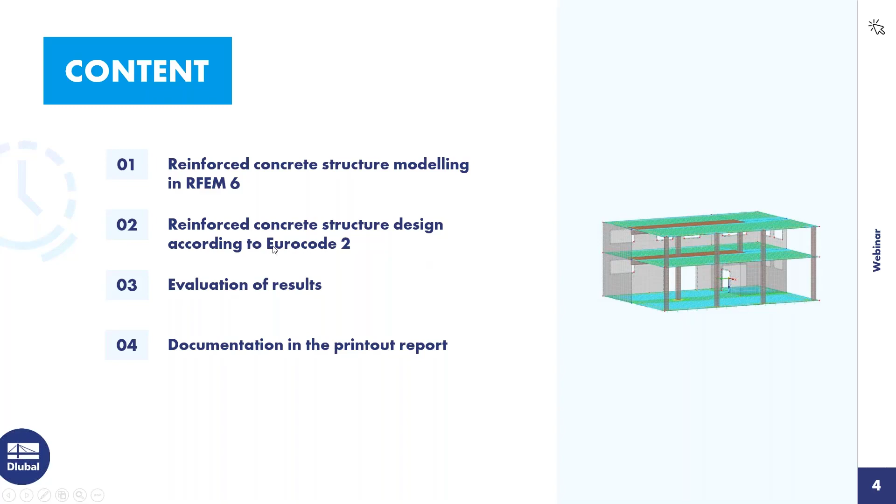And documentate our calculation. I will go now directly into the structure, in the RFEM structure. The structure was already defined with the members and the slabs. I only give you a short overview about the used objects.

The basics of the reinforced concrete design, and also the design of members, the reinforcement, definition of members, also the design by using the member representatives, if we have more similar members, was shown in the first webinar for reinforced concrete structures, which was made or shown in November of last year. There are shown the basic steps, how you can define the properties and the settings, and my colleague Caroline will write the link into the chat where you can find this webinar. It is very good for the beginning.

So therefore, I will go now today in the design, especially to things which were not shown in the first webinar. The punching design was not so detailed, and also not the rib design.

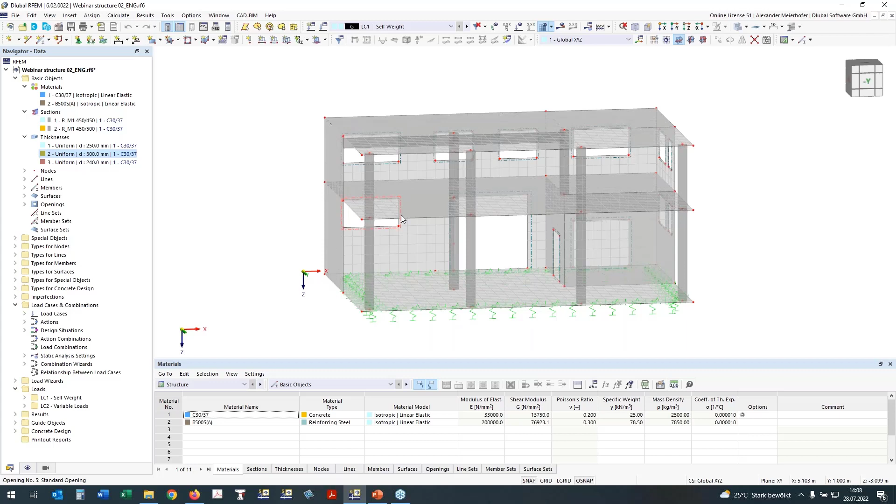The building now has elastic springs, elastic support, and this will also have an influence later in the settings for the deflection design, which I will show you.

At first, I want to deal with such nodes where we have the connection between the columns and the slab. Here we should place mesh refinements to get a better FE mesh. For this, I go to the data navigator, where by double click I can open a new nodal mesh refinement, and give my settings, which I have for radius 1 meter, and the inner target FE length is 15 centimeters. It comes from the dimension of the cross section of the columns.

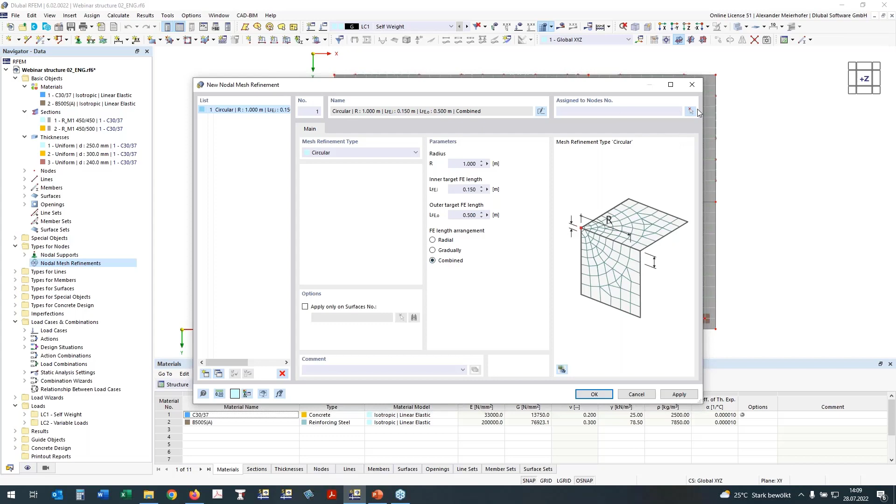For the length arrangement, I use the combined approach, and now I will assign the nodes with two rectangles where I want to have the refinement. If we take it through in the isometric view, we will see I have it caught, and everywhere was now my mesh refinement.

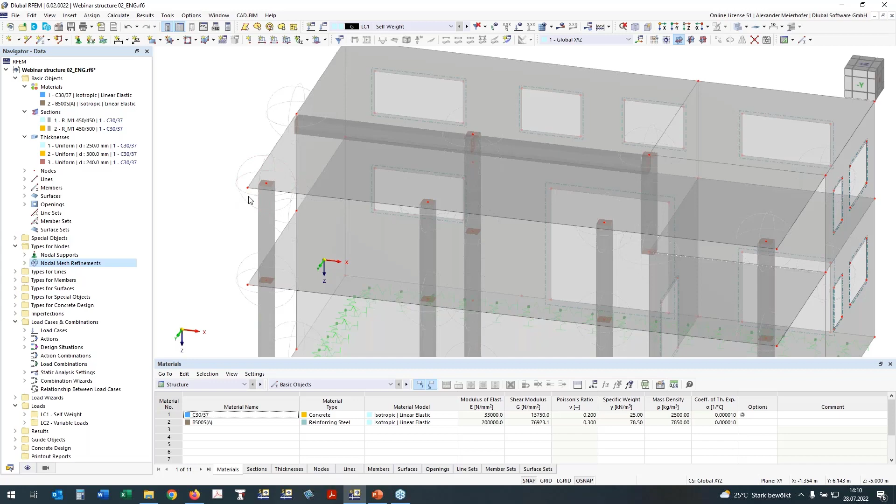On these nodes, from the column and the slab, we also have singularities, and how we can deal with these singularities in the concrete design is described in a very good knowledge base article on our website, which I want to advise you to read. Caroline will also send the link to this technical article in our chat, so you can find it very easily.

I will continue and select one approach, which is the use of the surface result adjustment. It means I will select or define the area which is exactly the width of the column, and set the inner forces of the surface there to 0.

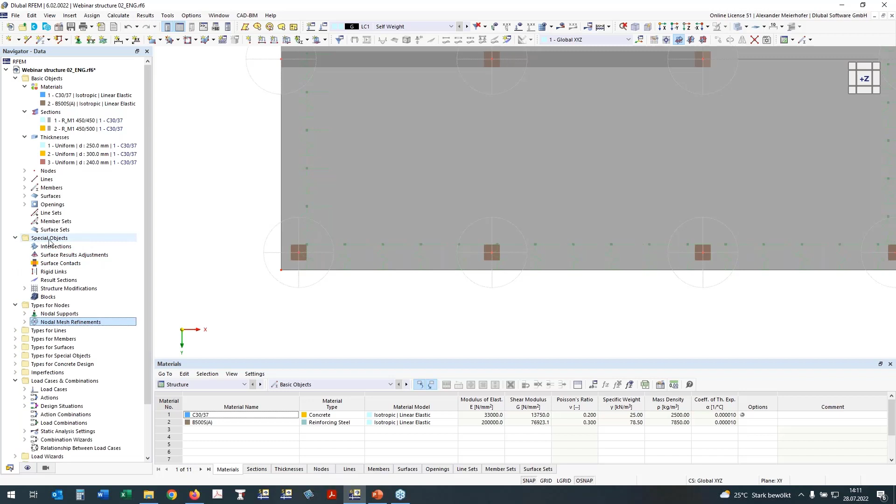Surface result adjustment can be found on the special objects. By double click, I can open the dialog, and now we can define a new rectangle result adjustment with the dimension of our columns.

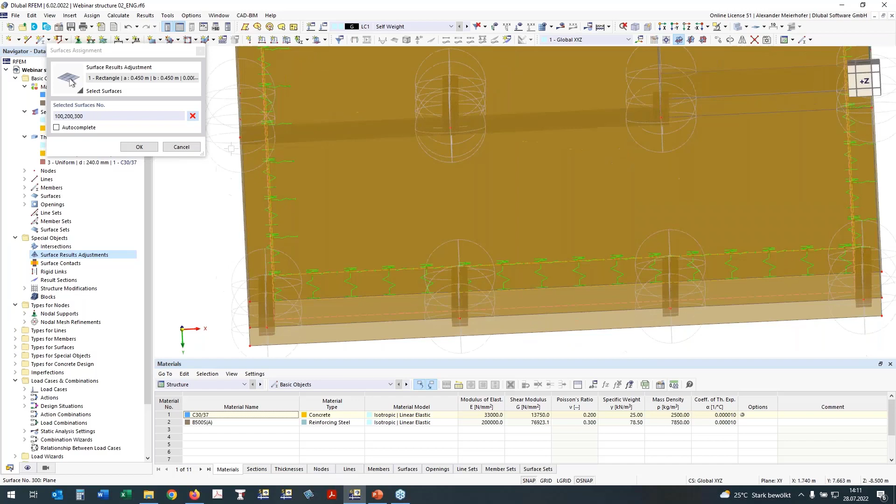I want to have it on all 3 surfaces, and you see the number of my surfaces was chosen so that I know where it is placed. So 100 is the slab on grade, 200 the slab over the ground floor, and 300 is the slab over the first floor. If I press OK, I have already assigned the surfaces, and now I have to define the center of my adjustment.

Here by copy, I can simply copy this adjustment and set only the new center of the result adjustments, and then I will have it in all areas.

I make one new and want to define it also over the wall. The width is 25 centimeters, and I defined a little bit bigger area, and defined it here because here is a wall. Define it also in this area.

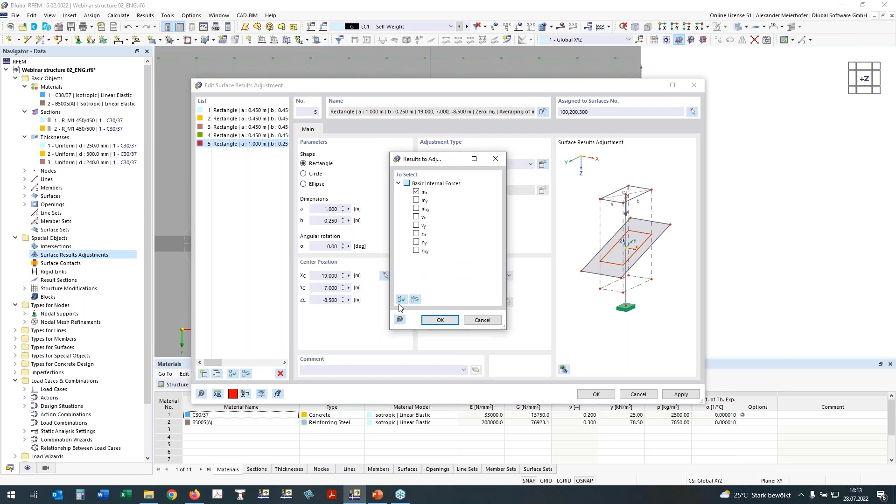I made one failure. Now I forgot to define the adjustment type. I want to set it to 0, and I want to set all inner forces to 0, and this should be done for all defined adjustments. So I was one step too fast before. This should be done before I copy it, and then it is always in the right setting. By OK, it will be placed.

We can see it, and we can also work here by drag and drop. We copy it by drag and drop. If we press the Control key, you can place it by drag and drop, and it's very simple to work with it. So this is then for the connection of the columns to the slab.

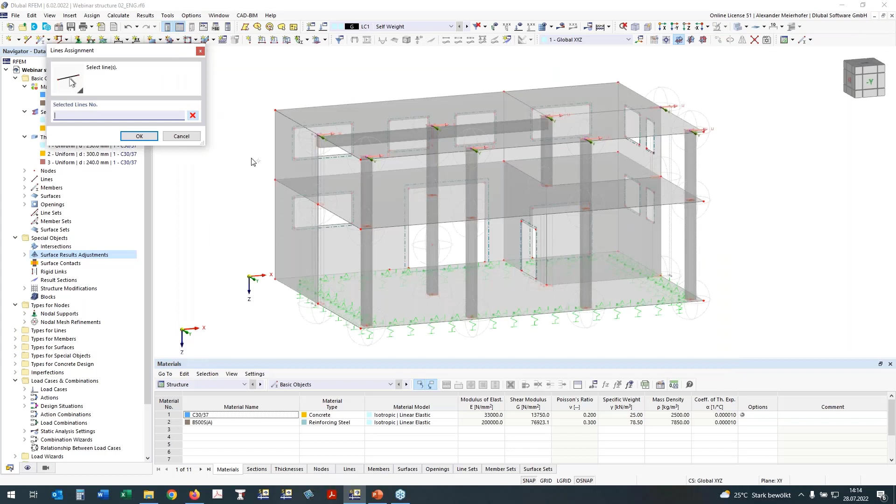One additional setting for the slab is necessary. I want to have hinges over the length of the supported line. The definition is very simple. We make a double click on the surfaces, and the edit surface dialog will open. Activate hinges, and in hinges I click to select lines, press Control, and then I have selected 3 lines where I want to have hinges.

The hinge type is by default already the moment hinge, and I will put it to all lines, the line hinges number 1. Okay, it's ready now, and if we take a look at our refinement, it is placed everywhere, and also the adjustment.

In the display navigator, we can deactivate the mesh refinements because I don't need them anymore for the work now, and the graphic is then more clear for the presentation. Display properties are placed now under the results objects, and then it's also deactivated.

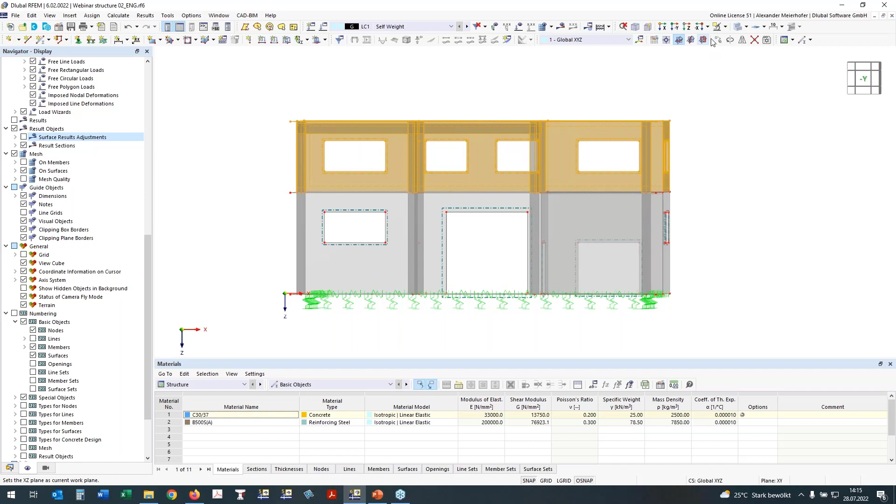As next step, I will define the rib for the slab over the ground. For this, I will hide the first floor by selection, and now I have the first floor.

By using new member, I can define now section rib by selection of the section number 2, which should be used for the web. The web should be 500 millimeter high.

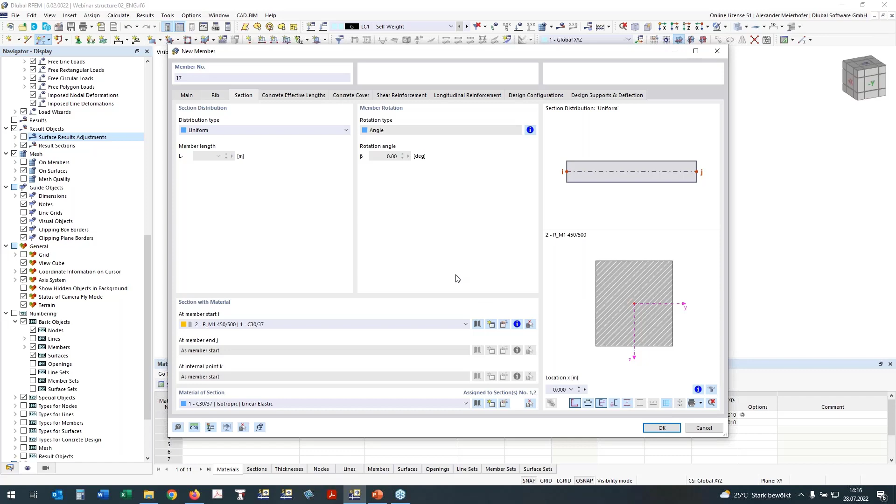I can define now the rib from here to here, and also from here to here. Oh, something was wrong. Okay, I do it again.

I know what was the topic. I will make the selection new and select only the slab which I want to show. So the new member is the same section, section number 2, and then from here to here.

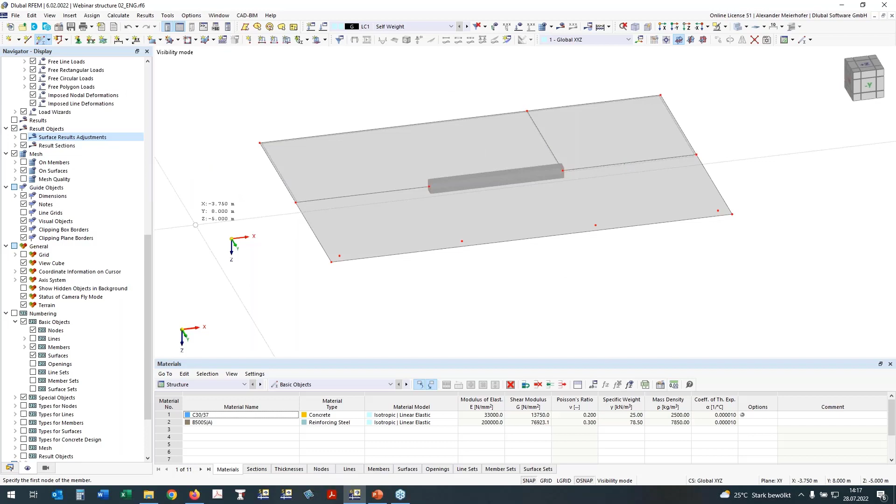By escape, I come to another point. So if we take a look to the complete view, we see here in the first part I took care about the rib. I go now in the rib section, and this is a very new feature that we can now also define more sections or segments during one length of the members. This is completely new developed.

I use here the calculation of the width, integration width according to Eurocode 2, and the splitting of the segments can be done in 50%, 85%, and also 100%. We see now we have more different integration points. Here we have an inner support, and it means we have to consider also for the calculation of the integration width the length of the neighbored span length. So I have to define here 180, and I have now my different integration width.

We have here also a new option that we can make a linear distribution from the integration width, and now we have defined the rib for the design.

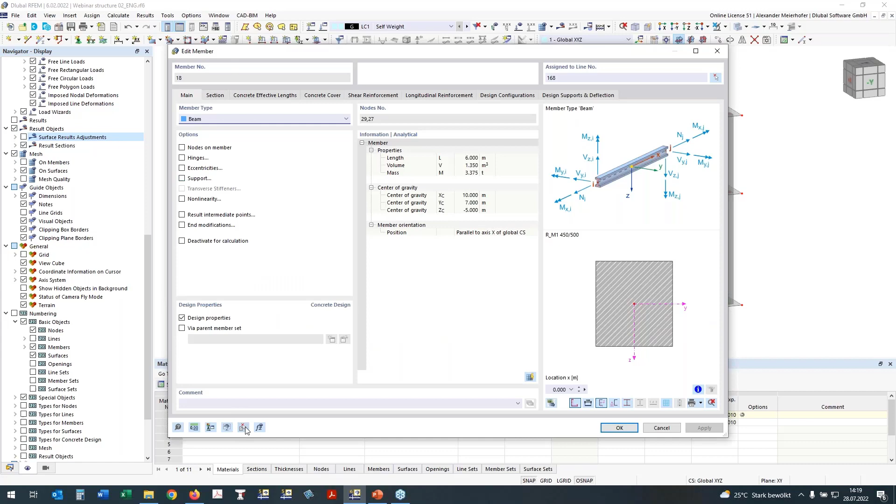For the second member, I use here the copy of object selections. It's a very nice tool. If I click here, we have really copied all inputs. It's a rib, and the only thing which I have to change is now that the end field is related to the segment, and this is for the user-defined point 80. And then the inputs for the static analyze is ready.

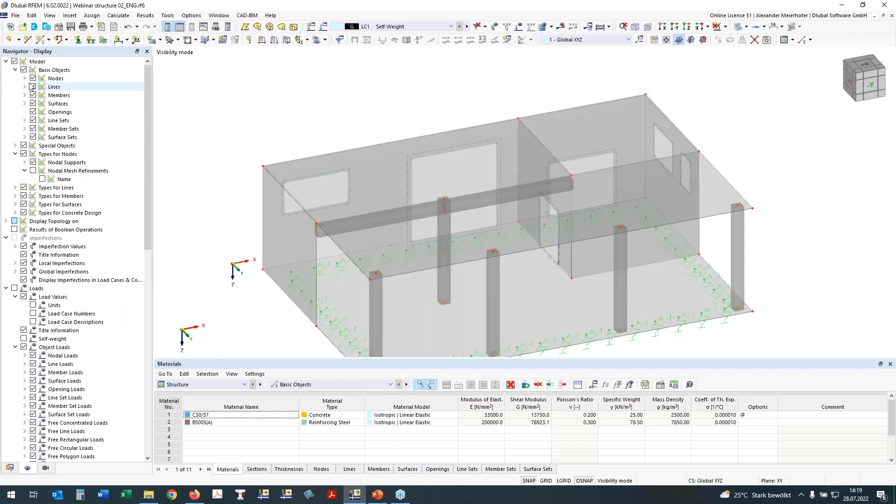And now I do it again what I did before. A very nice feature from RFEM 6 is now that we can show the rib section also in the graphic, and we see that the integration width is also shown here in our main graphic of RFEM.

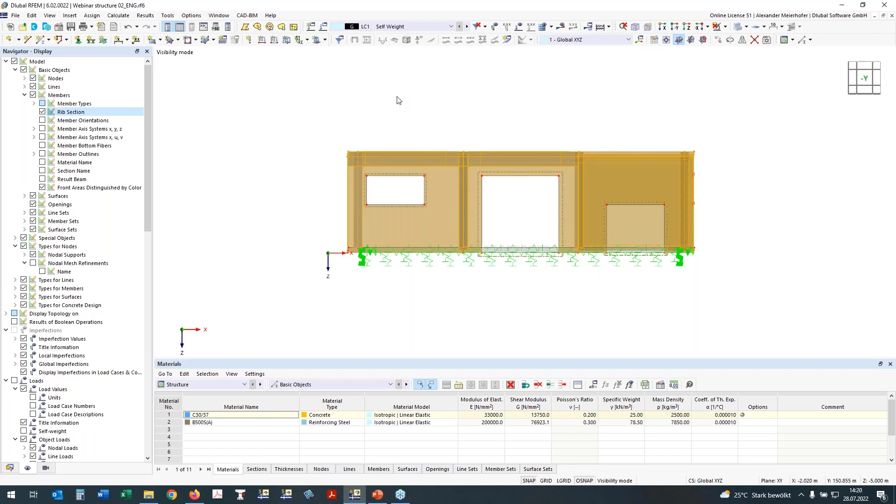Okay, now I will select again my slab here, and will continue with the definition of the design properties.

The design properties for the reinforced concrete calculation are activated by double click. I come into the surface dialog, and I continue with the concrete cover. The concrete exposure durability is defined by the exposure class, which is default to XC1. This is what I let.

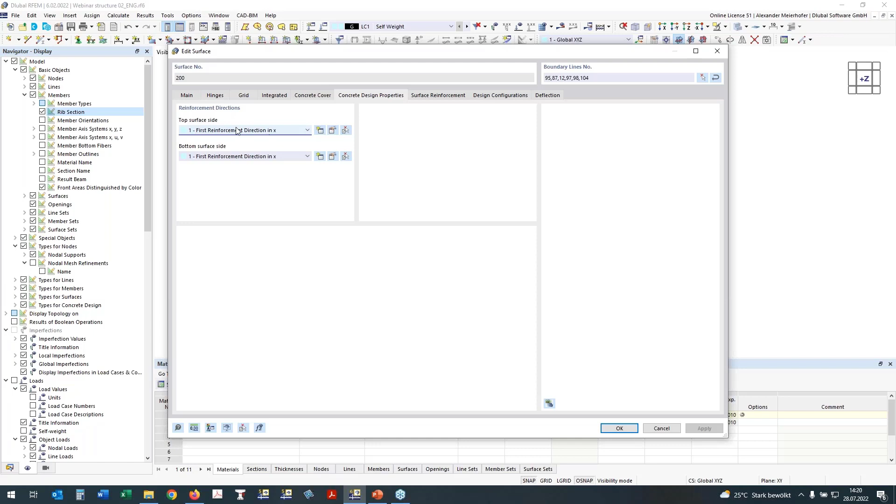It's okay. The design direction of the reinforcement, the first direction goes in X. This is also default, which I will not change. And here is one important topic. In the surface, I need a surface reinforcement for the diameters so that I will know the statical depth for the calculation. I just design a type of basic reinforcement.

Which will be in both directions, the diameter 10 with a distance also 10 centimeters, and by pressing OK it will be then assigned to the surface. Here are listed design configurations, which I don't discuss today.

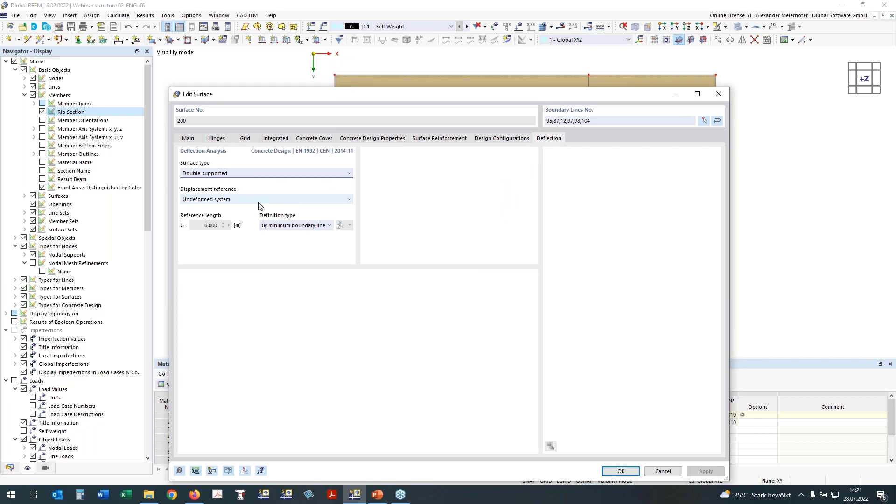This was in the first webinar very detailed. I will later take a look to the serviceability configuration. But here's one very important thing, which I mentioned before at the beginning.

We have an elastic supported structure. Therefore, it is an advantage to relate the deflection also to a deformed slab or plane. Here I use the parallel moved slab as a reference plane for the deformation, and as reference length I will define it manually by 2 points, saying my reference length for the maximum allowed deflection is from here to here. It's about 5.5 meters. By OK, I have defined all properties for the reinforcement design.

We can also take a look to the graphic. If we go to the types of concrete, we see here we have surface reinforcement longitudinal, and if we activate it, we see that the reinforcement is defined in this area.

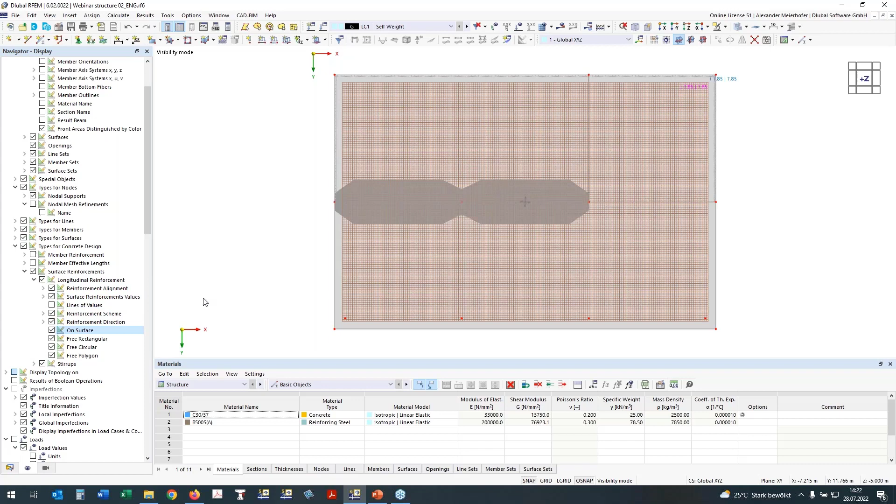Okay, I said that I will take care about the punching design of the nodes which are here. So it is like for all objects, we have to select it and go into the nodes or object dialog, edit nodes, and activate the design properties. Here it is only important for now that we have to check for design of the punching proof, and then we will have here also assigned the punching proof in the add-on concrete.

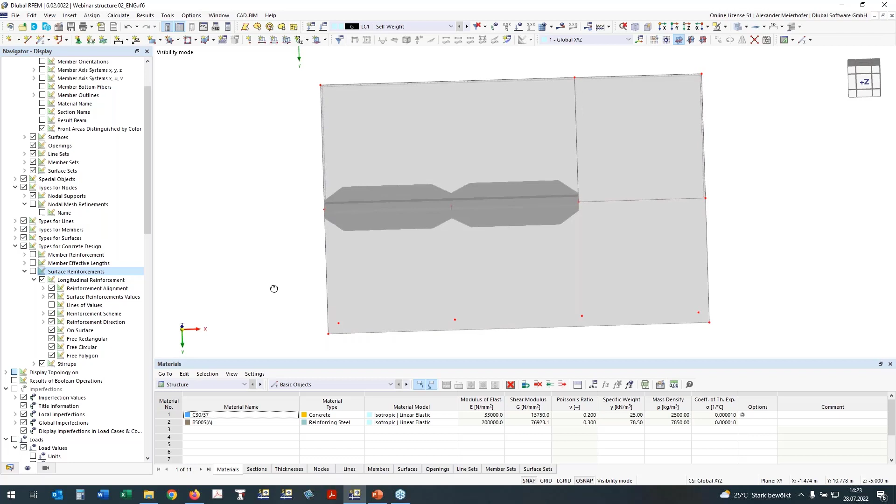I will go now to the definition of the ribs. Here we need also reinforcement. I want to design it not with two members, but with a set of members.

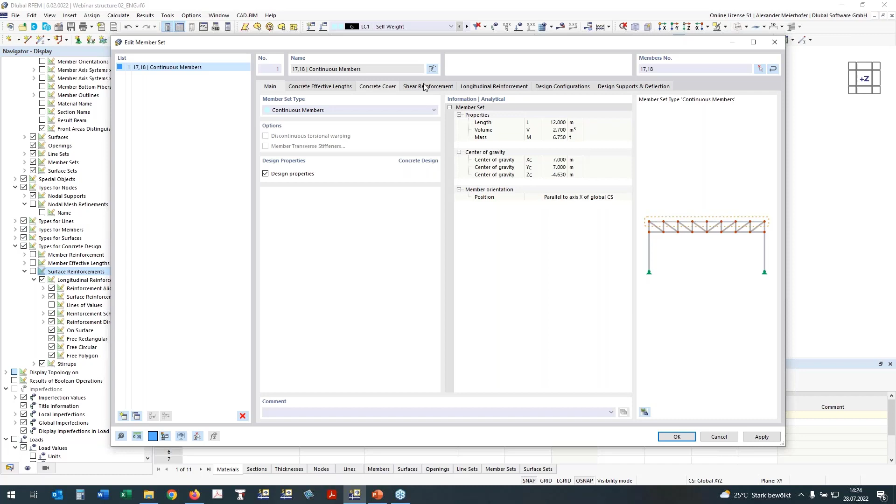So I select both, press Control key, and create a new set of members. Here we have now the new set of members, and I can say design properties for this set, and we see that all inputs for the design properties are now open. The concrete cover is shown, and here we have the same durability which we already used for the slab, XC1, and the shear reinforcement.

I will change the distance to 50 centimeters, and if we take a look in another view, we see here the cross sections, or the variable cross section of the rib is already shown, and also the reinforcement. I will go to the longitudinal reinforcement.

We see here the reinforcement which we defined for the slab design is already placed here. If we go more, we will see it. It is activated by this icon. If somebody doesn't want it, you can deactivate it, but I want it, so I will let it here.

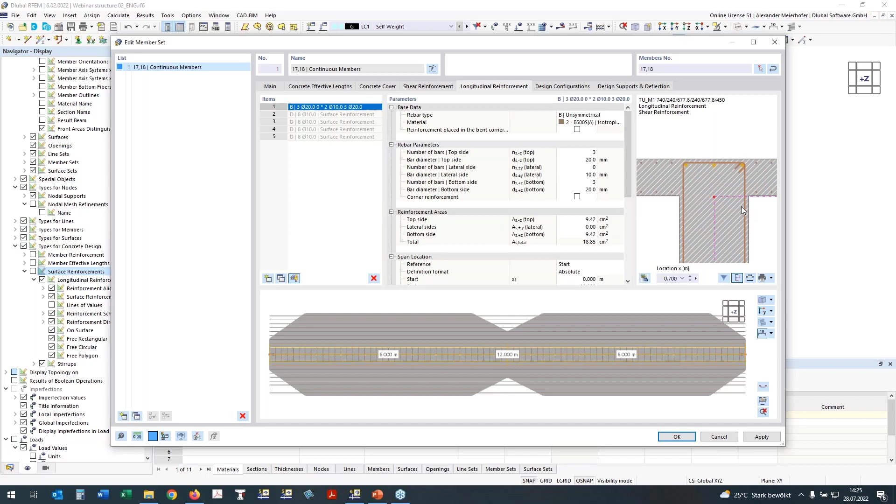But I will define now a different distribution of the longitudinal reinforcement. I want it unsymmetrical here in the web. So on the top side I will define these three rebars with diameter 20, but a lateral reinforcement also from 2 diameter 10.

And on the bottom side, I want to have 4 diameter 20. And it will be directly updated here in the graphic.

Here is also the 3D graphic of the reinforcement, which can be used for control of the inputs. Here we see a small reinforcement drawing, also the used shear reinforcement, which can be activated or deactivated. It's nice for control and for printing. Okay, I can close it.

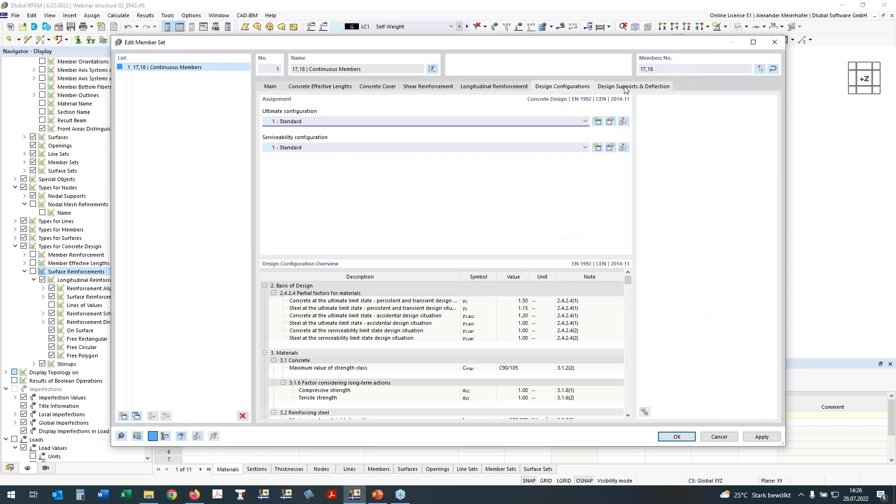Design configuration is the same as for surfaces in all parts, and now one important tab: we have to define the deflection properties or conditions. I want to check it only for the deflection in Z direction for the gravity loads, of course.

Here is the point: my reference is then the deformed segment ends. This is also the point which I mentioned. We have an elastic supported structure, so the supported ends will be a little bit displaced in Z, and this I don't want to have in the design check for the deflection.

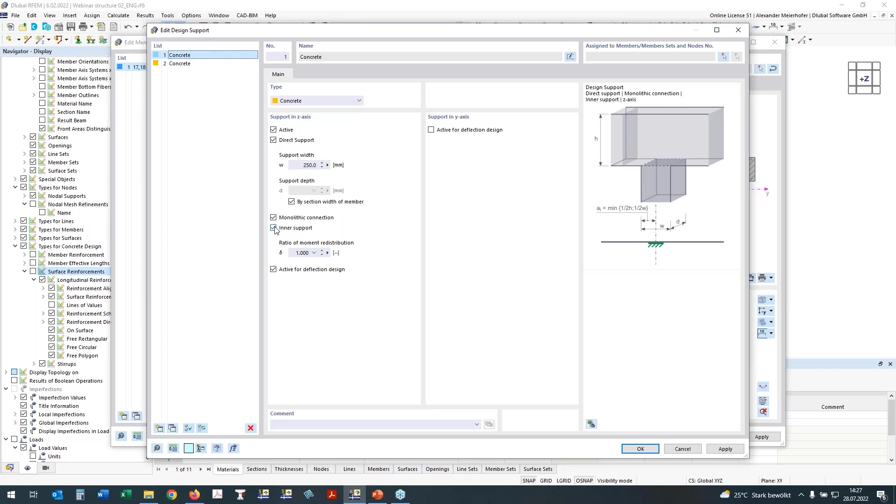Important is that I generate design supports at the ends or in the middle. We have here design support in Z direction, and our wall is 250 millimeters. It's a monolithic connection, and will be used for the walls at the end and the start. I directly copy it and use the width for the columns, which are inner supports, and here I have to deactivate inner supports and press OK, and then it will be placed directly at the beginning.

I will change the view here to see it. Here we have the first one, and at the end it will also be placed, with the 250 millimeters width, and in the center I will also use the design support, but now for the column it's bigger, 450 millimeters.

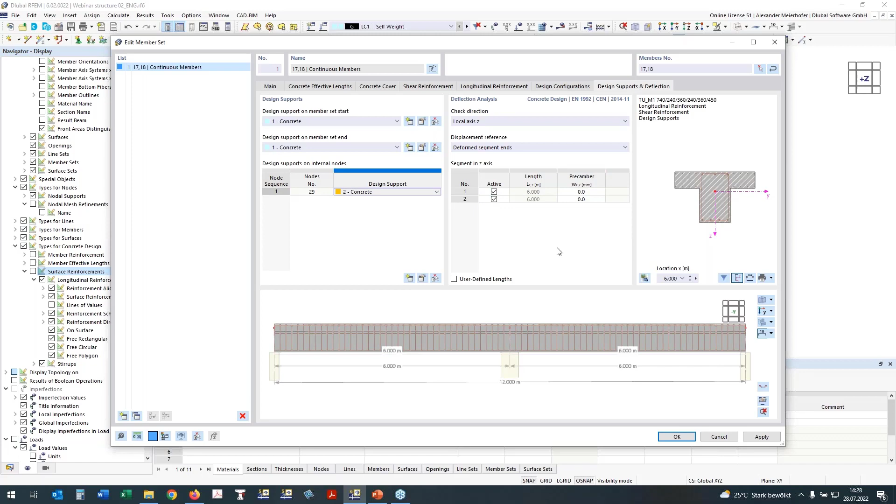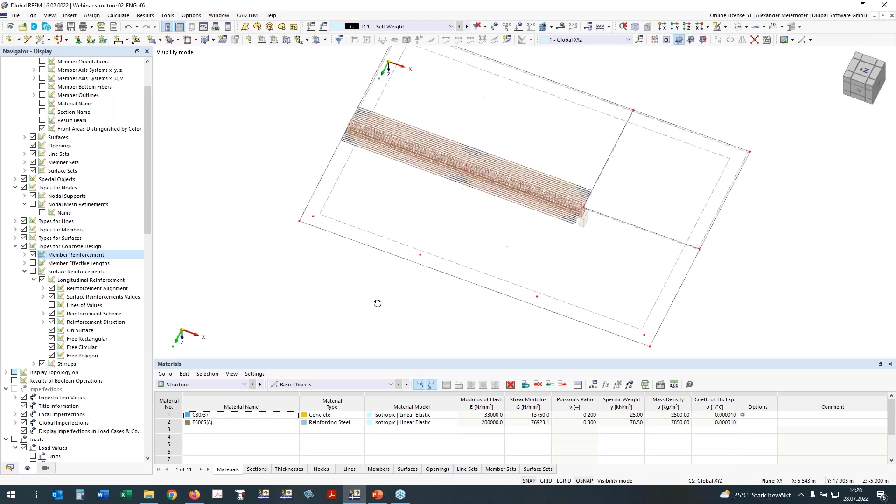And we see here now for deflection we have some lengths, 6 meters and 6 meters, and if we have some pre-camber we could define it here, but in this case I don't have it. We can confirm the inputs, and also check the member reinforcement and display it, and see that everything is okay.

Before I start with the calculation, I will make now new object selections. Has to be a little bit bigger. Create new object selection, and the advantage of this object selection you will see immediately after closing the dialog.

This is my slab over the ground floor, and I press OK. And now we have here in the guide objects the object selections, and you see I have already done a little bit more, but the new one is object selection number 200.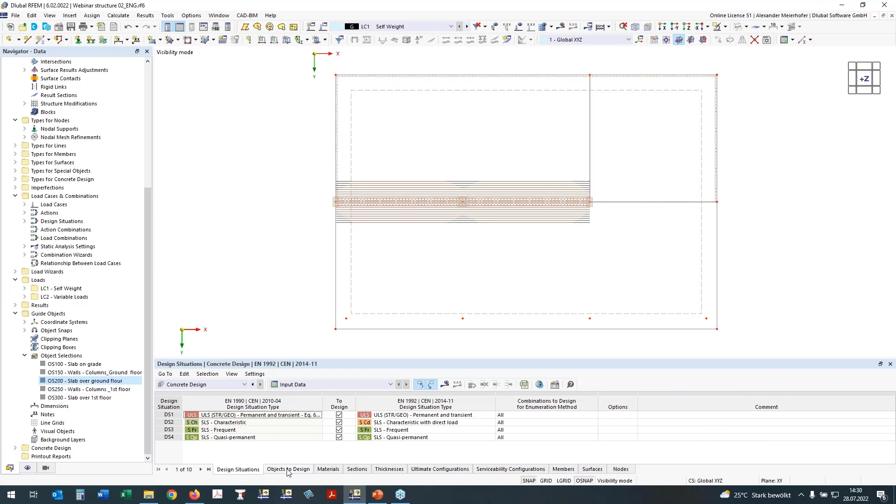And if I go now to the concrete add-on, I can use the object selections directly to define all objects which are there in the add-on. It is then replaced, and it will only show the object, and it is very good to organize the work.

Before I start with the concrete design, one hint: what you have to check in the basic settings. You have to activate the concrete add-on in the design add-ons, and in the standards you have to define the used standard for reinforced concrete design.

Here I will use Eurocode 2 with the original rules, so without national annexes.

If we have the loads, this is also one additional hint. I have defined a load case, self-weight and variable loads. We have to define the action category there - it's for the office. And in the base data I have the standard group and the combination wizard defined.

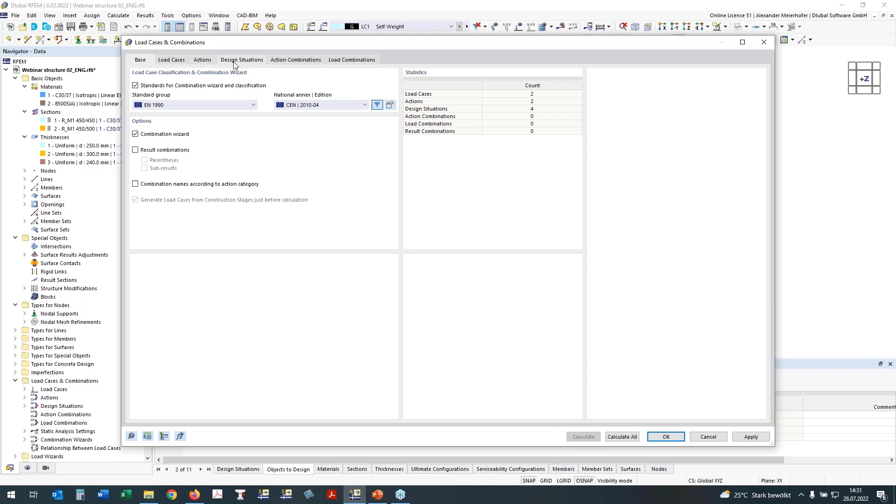In the design situation will be automatically listed the serviceability and ultimate limit state design situations, and here will be the list of all activated design add-ons.

Here we work only for the concrete design, so therefore I activated it for the concrete design, and all load cases related to this design situation will be calculated. I can multi-select it, and what I have to do is select my combination wizard.

The combination wizard here is defined in this way, that we have to generate load combinations, and the static analysis should be done by first order and geometrically linear.

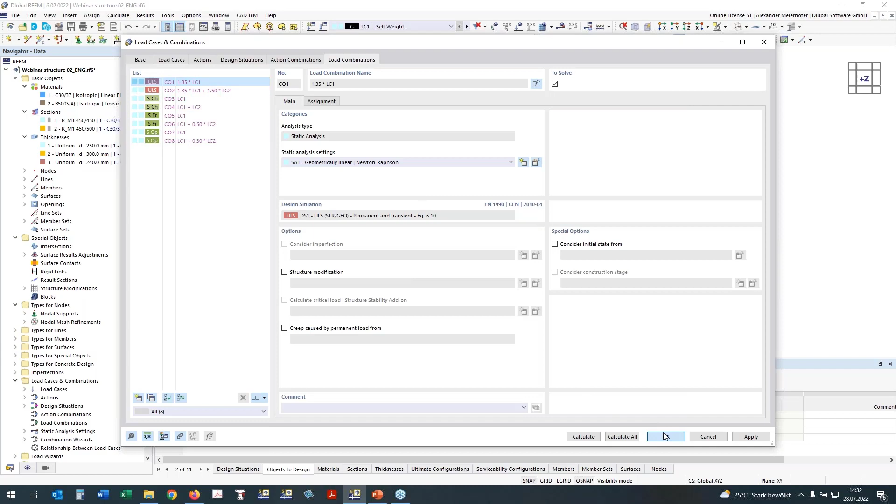If we go then to the register load combination, these combinations were generated automatically and will also be used in the design of the reinforcement.

Now I go back to the add-on concrete. We have here already designed the object selections. Material and sections are only listed for control.

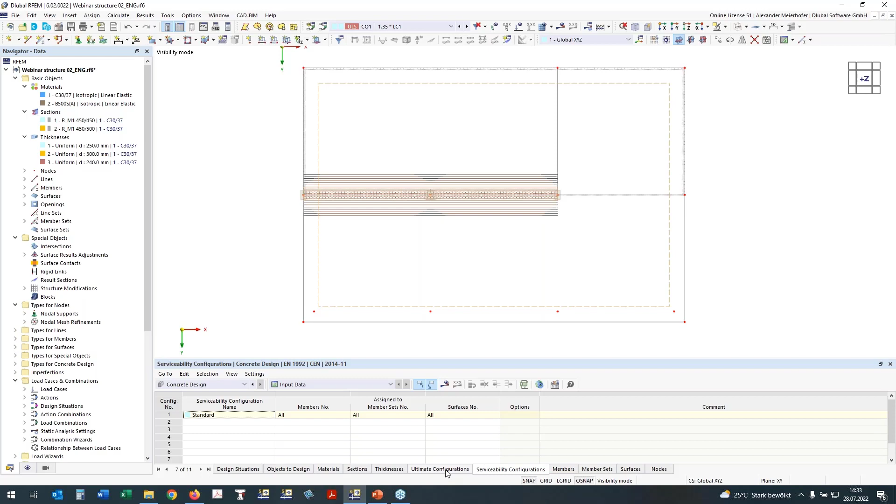Here are the configurations or settings which should be for the ultimate limit state, and here we have the serviceability state. I will take a look into the serviceability state configuration.

Here we have the stress check which should be done, or the crack analysis should be done by finding automatically the limit value for the crack width. So it is here according to the defined exposure class. We have XC1, so therefore I expect in the calculation 0.4.

With the deflection calculation, here we have this L, the reference length, divided by 350. And here is the crack state detection for the serviceability.

This I want to explain a little bit more, because this is really new, which we released two weeks ago, and therefore I'll take a little bit more time for it.

The first one is the crack state calculation for each associated load. So each load case or load combination will be considered and calculated for itself.

Crack state determination as envelope of all SLS design situations. It means the program checks all load cases defined for serviceability and uses then the correct element, or the most safety setting.

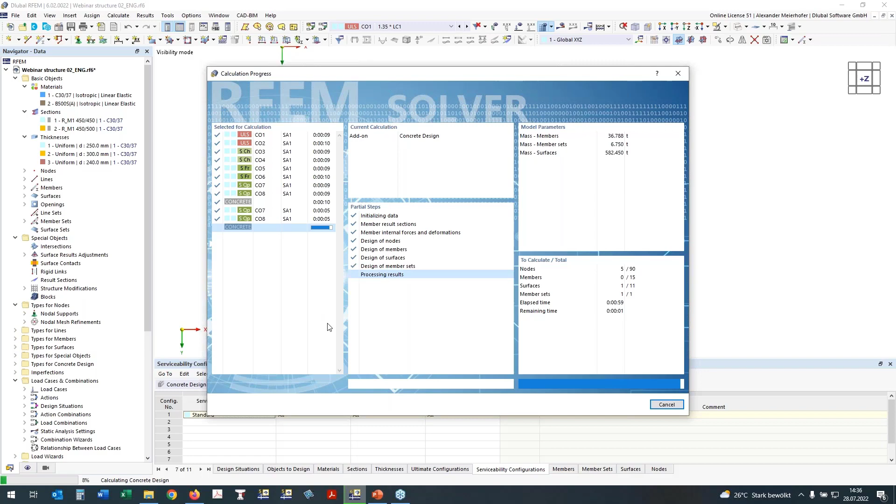Okay, so now we have here an overview of what is fulfilled and what not. We have very detailed tables - the work with the tables was also shown in the first webinar.

Today I want to work more with the graphics, and use now only the settings for the member. Design ratios of the member we see here. It is everything clear here - I have 2% about the detailing of the spacing, and all design rules are okay.

The design ratios, one thing more, are here also sorted by members, by surfaces, and by nodes. The design ratio for nodes is also new - this is the design ratio for the punching proofs, and we see here it's not fulfilled.

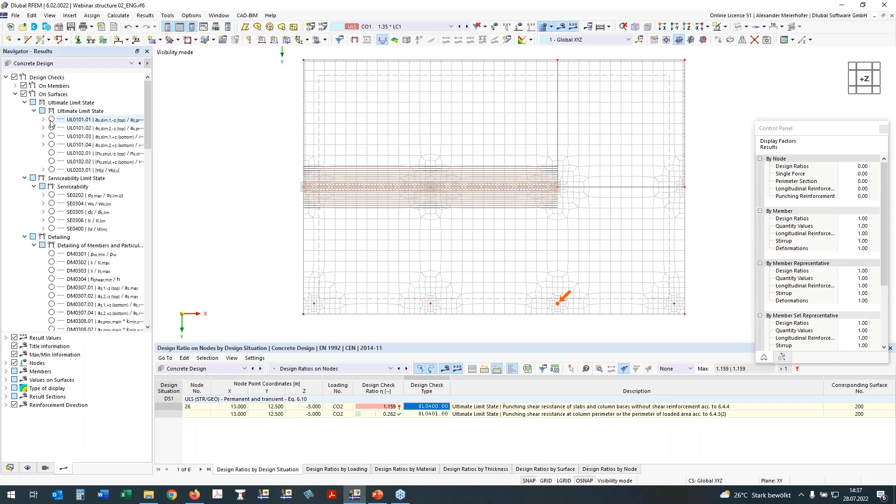I will go now to the graphical results, and firstly we took a look at the results of the surface. I want to activate it as only extreme values, and here we have the panel. So here's a ratio of the defined reinforcement, the ratio between the provided and the needed reinforcement.

And here we see in the red areas less reinforcement defined. On the top side, here is also a punching problem. I would expect, of course, more reinforcement here for the punching design.

If you take a look at the bottom reinforcement in the first direction, we have everything in the green area. The maximum ratio is on this small part, but the main area is under 1. And the second direction, on the bottom reinforcement direction 2, is also okay, with a ratio of 93%.

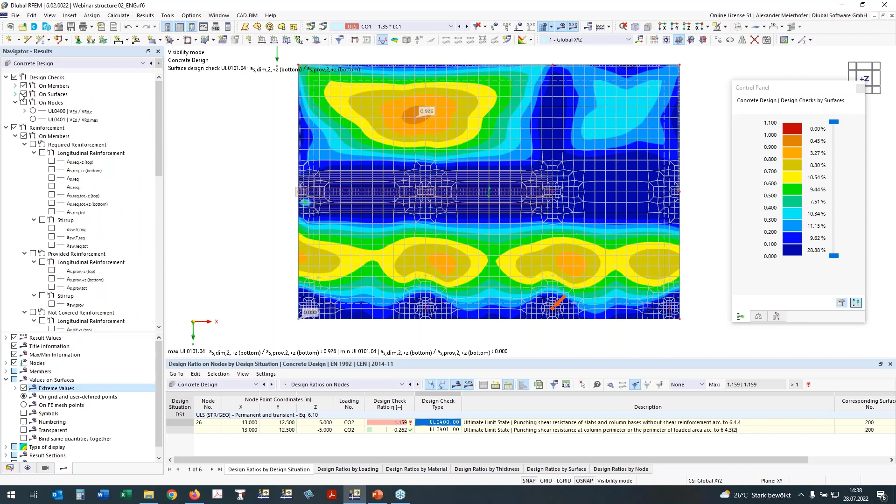The punching proof of these nodes is now shown in the register tree for nodes. And if we activate the VED for nodes and vRd,c, we see the corner columns can be designed, but the columns in the center are overloaded, and we need more reinforcement here.

To work with it, I will go now to the reinforcement and take a look also at the nodes, and show if we need a required punching reinforcement. Here we see for the required punching reinforcement we need 0, but we then need longitudinal reinforcement. In the configuration, I said please calculate the required longitudinal reinforcement to avoid shear reinforcement, and we see if we would place 12 or 13 square centimeters, everything would be nice.

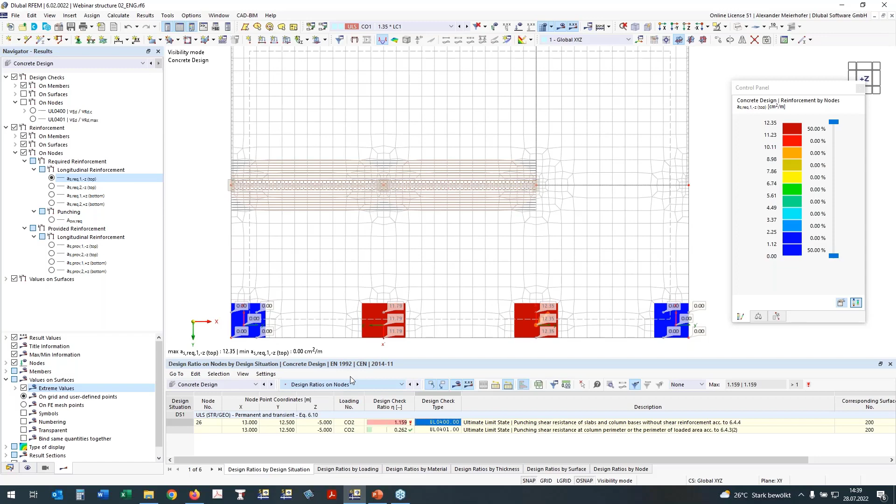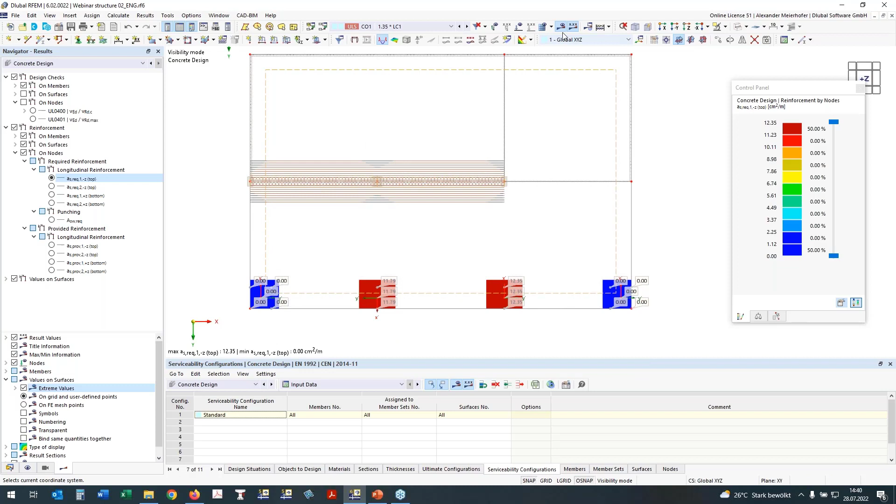I will now define the missing reinforcement. For this, I will go to the global settings of my module add-on. I will deactivate the deletion of my add-on results if I change the reinforcement, and now I can work in the inputs. I deactivate also the mesh so that I have a nice view.

And go now in the result navigator to my types for concrete, which has the surface reinforcement. With new surface reinforcement, I generate a new one, which is a free rectangle area. I assign it to my surface number 200, and the missing area here is for punching.

About 7.8, and I want to have it only on the top direction. And here is the area which I want to define. I activate my grid to have good coordinates, so I have a grid of 25 centimeters, and this area is already defined.

I copy it like it was for the surface results adjustments of the surfaces, and I can really use the same concept here.

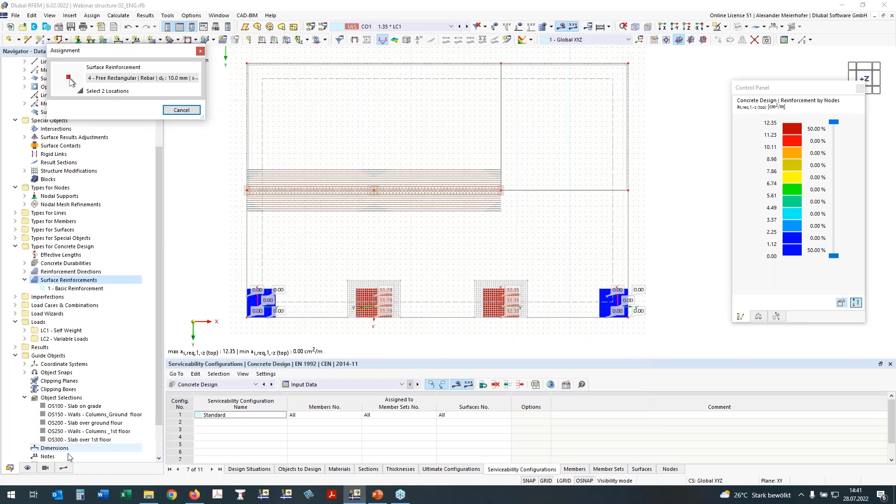Now I want to do the input also on the other missing parts. For this, I copy the existing one and go in the result navigator, so we can activate the graphic we want for surfaces, and say the surfaces have not covered reinforcement on the top side in this direction.

And if we take a look here, I will define the same area over my supported line in the first direction, and in the second direction I will do the same area, and take a look what is here. Here I need also some reinforcement, and took it over this length.

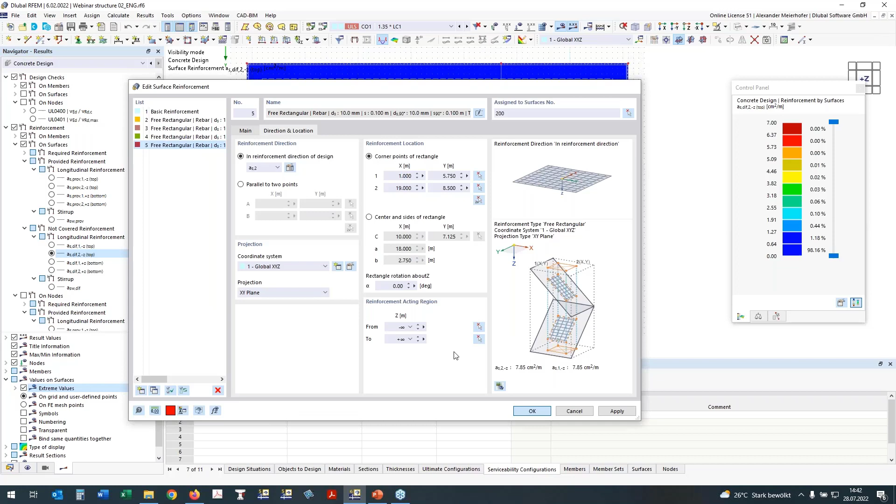It was a little too small, so you can make it again, and by pressing OK, it is then confirmed, and it is in the structure.

For the surface, I can then take a look where my surface reinforcement is. I go to the surface reinforcement and deactivate on surface, and we see what part of reinforcement is defined, and I can also check if the direction is right.

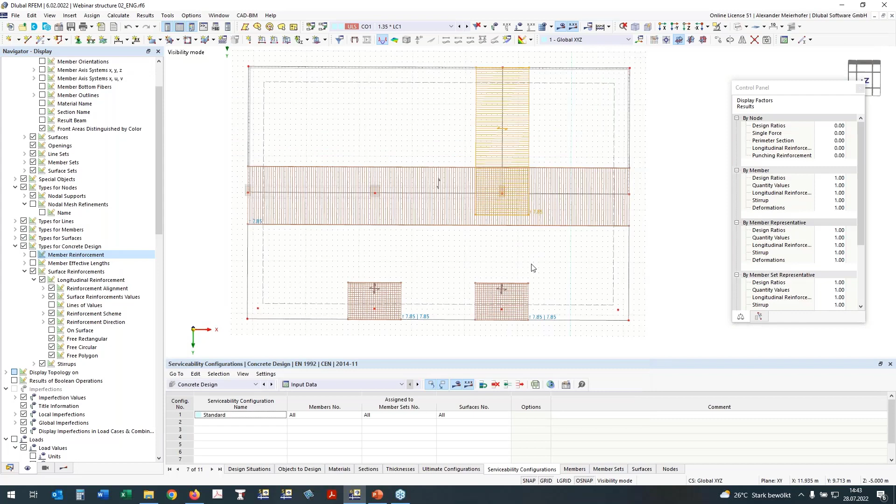Here I have defined one thing too much, so this one I only want in one direction, and it's the same here. By OK, we will see I have only one direction. So easy is the definition of this additional reinforcement.

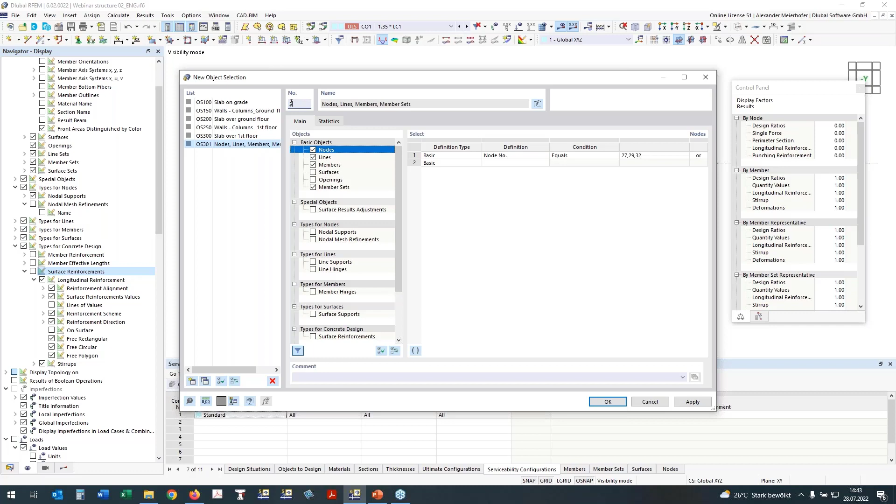Now I want to take care of the reinforcement in the rib. For this, I select it and change the view, and generate also a new object selection, which will be then named the T section.

Press OK. And here I work now with the design checks on members, and take a look at how my cross-section resistance is. We see I'm under 1, so everything is nice.

If I take a look at the shear reinforcement, the shear proof is also fulfilled, so I need no additional inputs. The serviceability is done in this way, that the stress of the steel is checked.

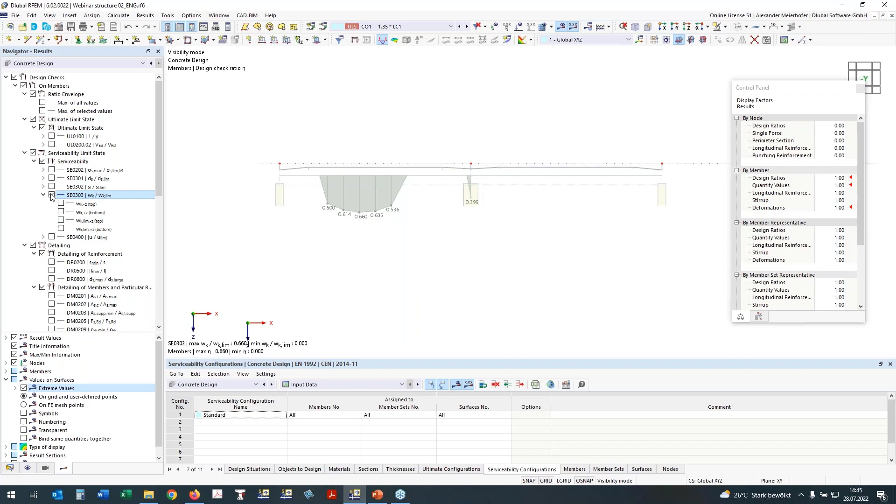You can activate here also the direct value of the crack width. For example, we have here only 0.26, and it is also for the deflection. The ratio is very small, and the existing deflection is now 0.6, and we see here it is related. Here is the end, it goes to 0, and this comes from the relation to the deformed structure.

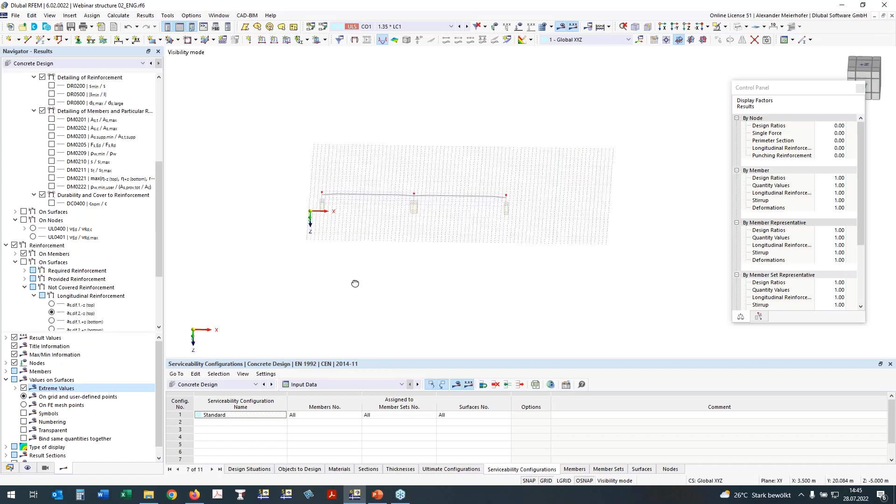If we take a look to the required reinforcement, it is also here in the table. Required reinforcement of members, as top, as bottom, and we can take a look at it. You have here the graphic.

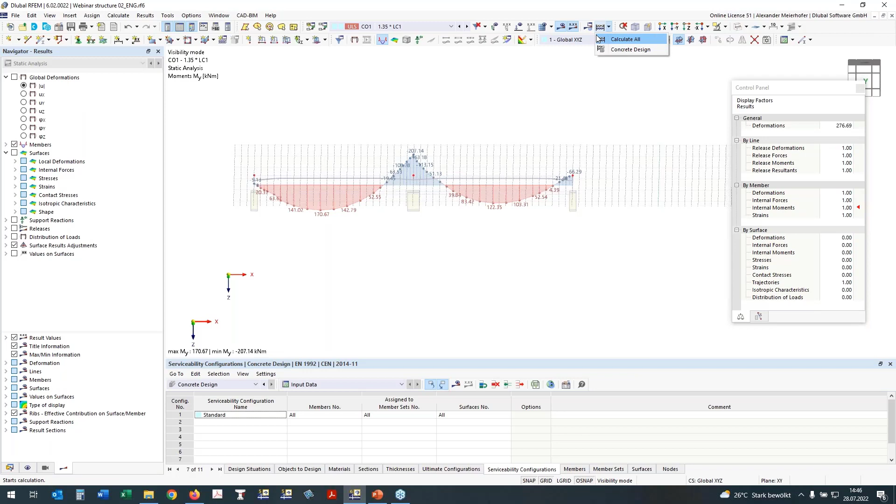If we want to print it to the protocol, we have to generate a new protocol. What we have to consider is that the calculation must be done again since we changed the reinforcement. For this, I go to the global settings, activate the deletion of the add-on results, and then it will be updated and deleted. Now I have to start the calculation of the concrete design add-ons new. You can do it also here in this icon and start only the calculation of the add-on.

The statically analyzed results was not deleted because the reinforcement has no influence to it. Now it is only the calculation of the add-on concrete, which will be refreshed and done again. As I said before, this is a two-step calculation. In the last step, we have here also again a concrete calculation for preparation of the results and the graphic.

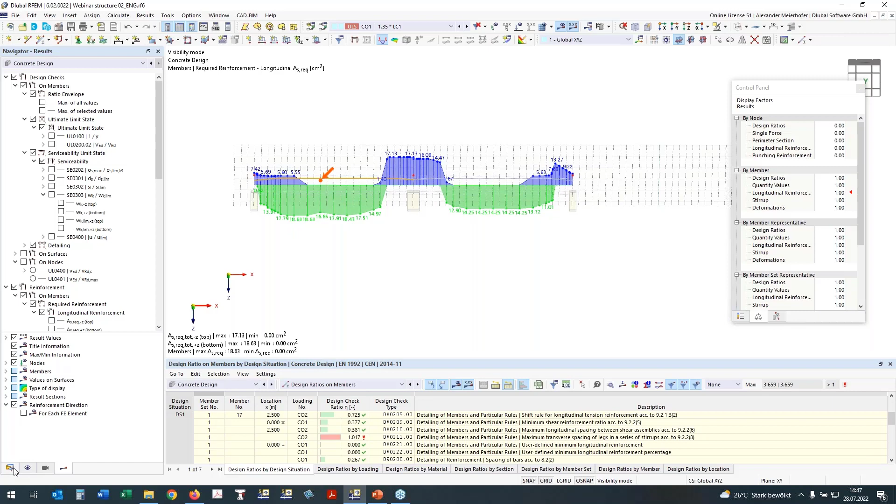So now we have the updated results. Design ratio by nodes, by members is okay. Then I will go to the printout report in the navigator and show you very simply the work with the printout report.

If we generate a new printout report, I make it here for the concrete results or concrete design, and assume that all other documentation of the statically analyzed will be done separately in another printout report. Today I want to show only the design or the report of the concrete results. So types for members, types for surfaces we don't need, but types for concrete design is necessary for the durabilities and the surface reinforcement.

What I also need is here the concrete design, which we have to discuss maybe also what is necessary. We see here it is possible to show every tab which is also here in the add-on available.

It can be printed, but I want to have here only the design ratio by set of members. For nodes and for surfaces, the reinforcement for members should be also only shown by member set, because I design only the member set. The provided reinforcement by member set, the not covered reinforcement I will not show. For the reinforcement by nodes, I let it like it is. The design overview will be deactivated.

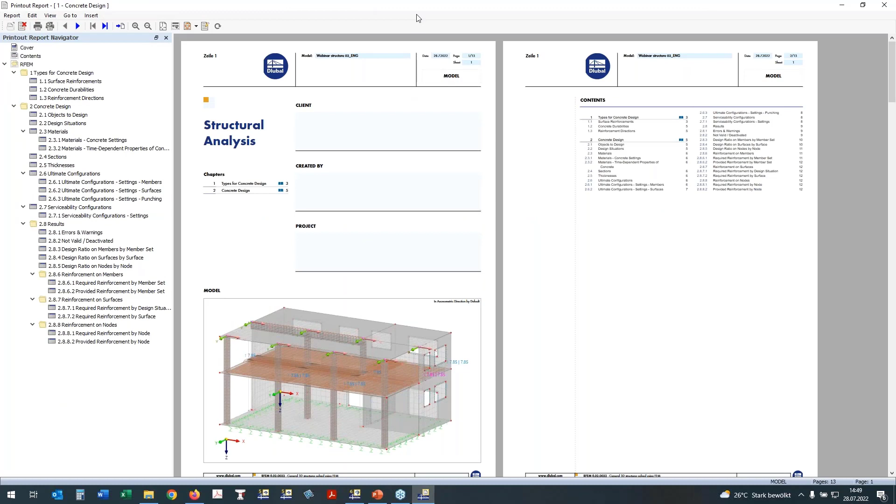By save and show, it will be generated, and the result, the printout report is one of our new developments in RFEM 6. It is completely new. It is a separate file instance, which can be used here. It can be opened parallel to the RFEM calculation.

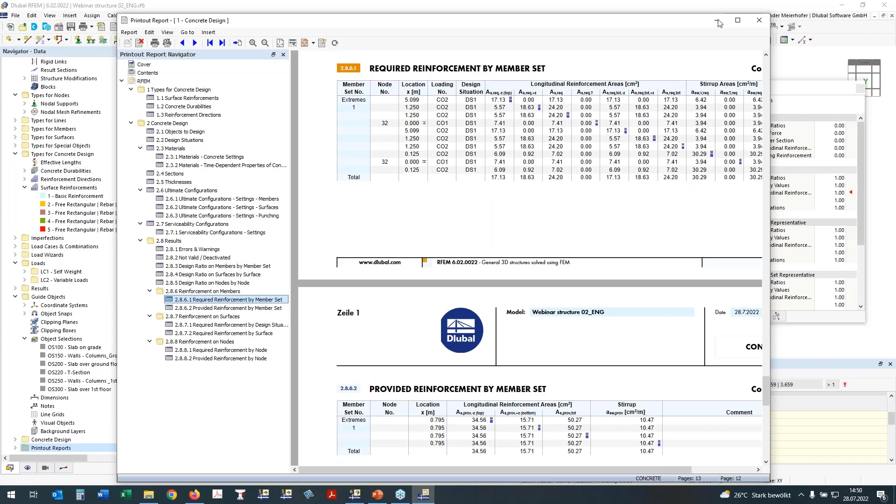If we go to the required reinforcement by member sets, we will see then the list of the required reinforcement. Here I want to show also the point how we can print the required reinforcement, because in my eyes a picture is better, a diagram than many tables. Here we can use the printout report, the graphic.

Here I want to use the current one. New is also the possibility to define an area in RFEM to print it to the graphic.

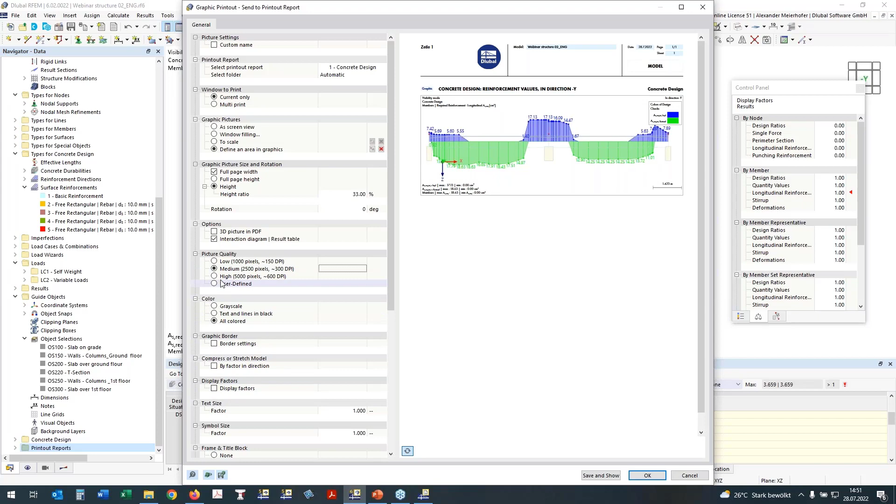I will activate the grid so we can move it, make it a little bit bigger. This area will also be saved and used for later. I make it a little bigger, and the panel should be outside of the graphic. By OK, it will be printed to the protocol.

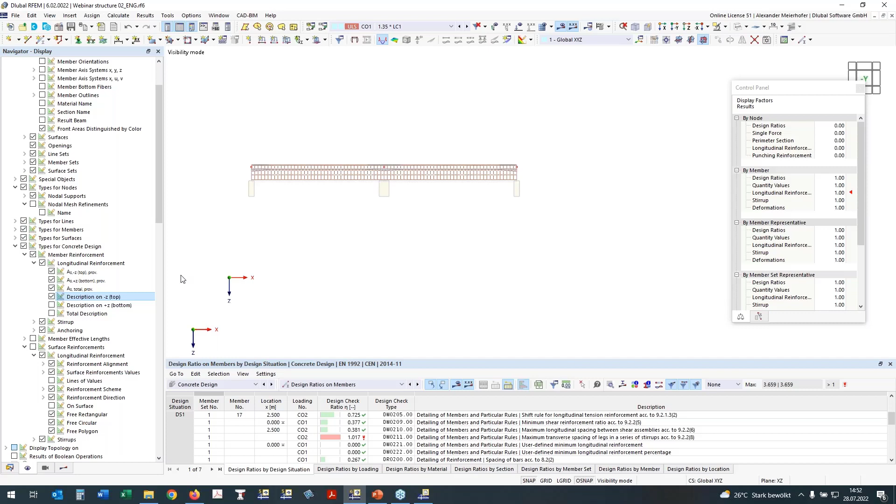If we activate it, you can see it here, and make it smaller. Everything is here, and by using the inputs of the reinforcement, we can deactivate the design checks on the required reinforcement and activate our member reinforcement longitudinally and use the descriptions.

With description, we can print it directly into the protocol using the same functions. The same icon will be pressed, so the area is the same. I don't change anything, and with OK, it will be printed. Now I will take care of the slab.

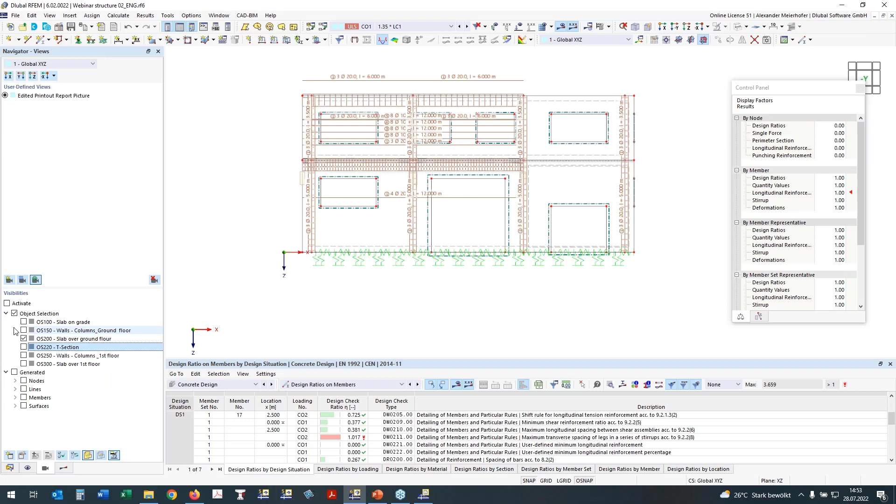For this, I will go to my view navigator, display view navigator, and this is the next advantage of the object selections. If you remember, I have here the slab over the ground floor, and if we take a look in the Z direction, now everything is activated that I had selected before, and I can continue with my presentation of the results for the slab.

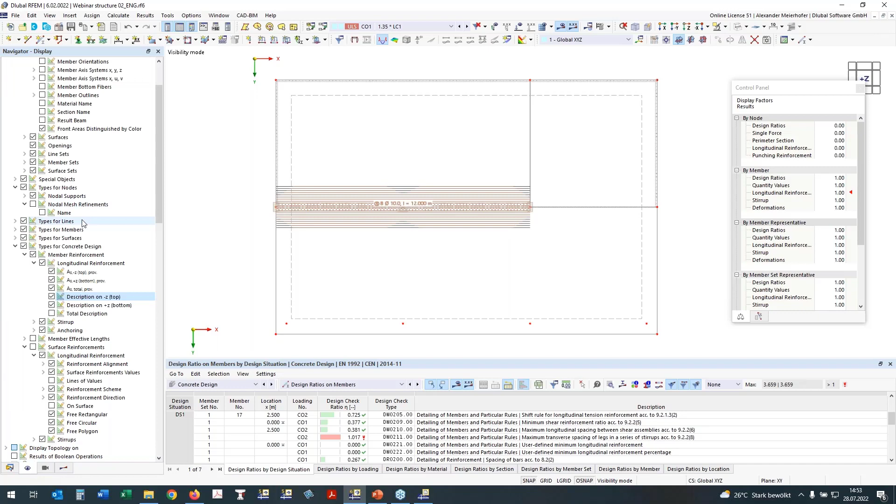First I deactivate my member reinforcement, and in the result navigator for the design checks of the surfaces, I go to the ratio of my longitudinal reinforcement on the top side. It is okay. The bottom was also okay.

We take a look at the displacement. This is the ratio like it is for members, and here is also the deflection. Important for me now is the punching proof, because this was not fulfilled before. We see it is now under one, the ratio. It's perfect, and we can now print a documentation of our results.

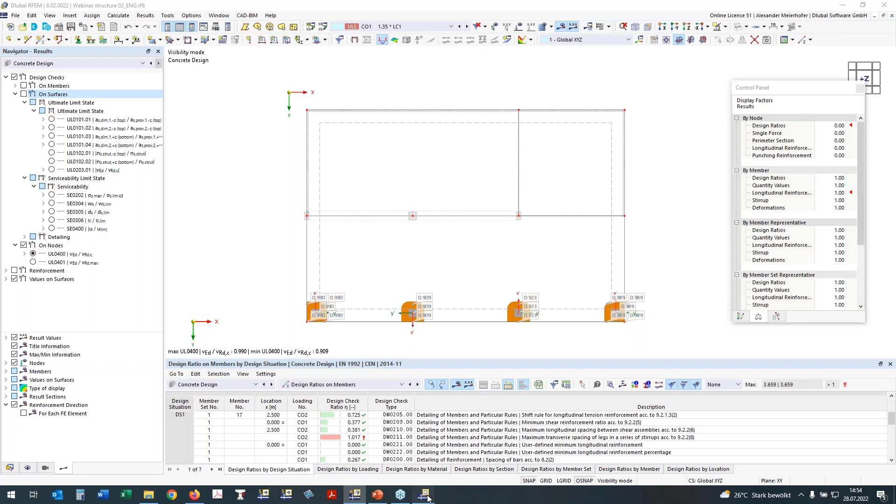I want to use a bigger paper now, like it was done in the documentation. The first printout report is the A4 format. I want to use a bigger one for the plots. I make a new printout report and say this is only my annex for plots.

For this, I deactivate all settings here and generate a new page format. I have to select a printer which is possible to print bigger pages. Here is my printer, which can print A3, but you need 7 millimeters distance on the bottom side, and I don't need a cover page. With OK, it is saved, and save and show.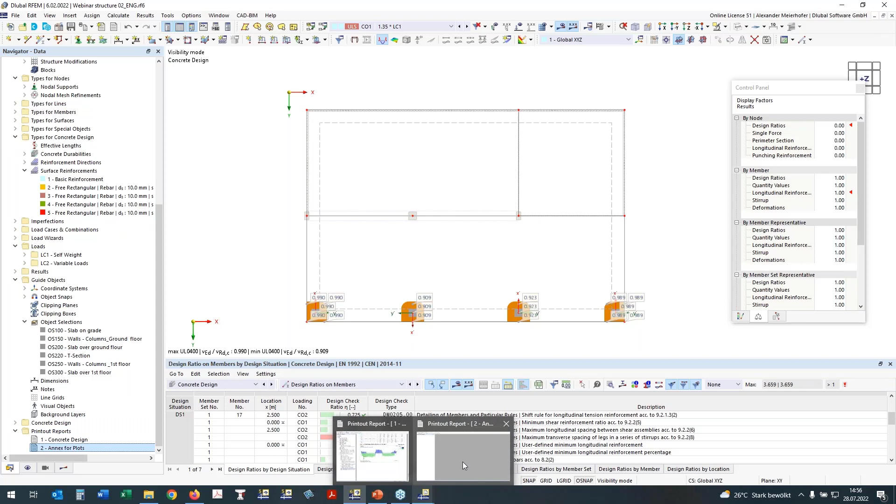I will get a new protocol, which is also shown here, but it's empty until now, because I printed no reinforcement or result there. I want to use the same one again and print the surface here. You see the last view is saved.

I want to have a new one. I want to use it in Z, define it in the new area, so from here to here. With OK, and with the multi-print, like I did before, I can print all result diagrams which are necessary.

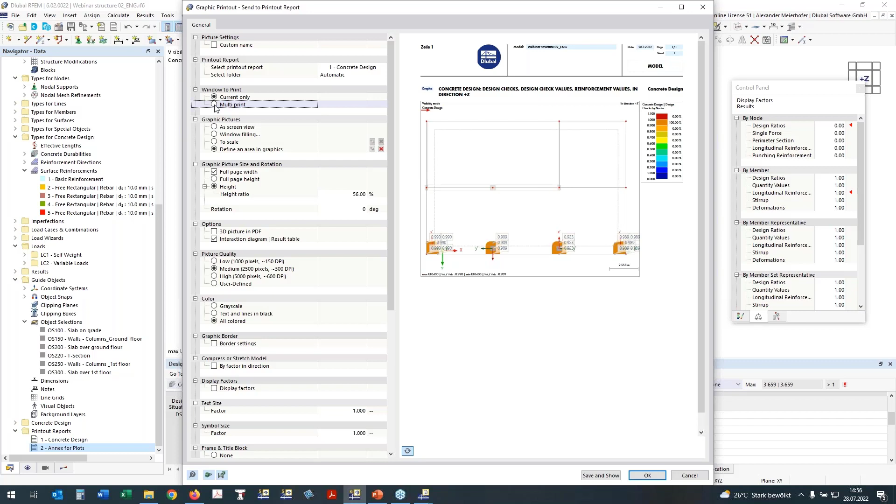Model is not necessary, load cases here not, and in the add-on. Now you see this navigator is really the same navigator as the result navigator in the main program, and we can print all the results we want.

So here I print first the ratio between the provided and the required reinforcement, then the crack width calculation with top and bottom crack width, then the deflection design check with the UZ graphic detailing. I don't show.

I will also show the nodes, the punching nodes, and here is the used shear force, the punching force, which is set in the calculation for RFEM. This is a very nice graphic. On each node we see the value which was assigned in the calculation.

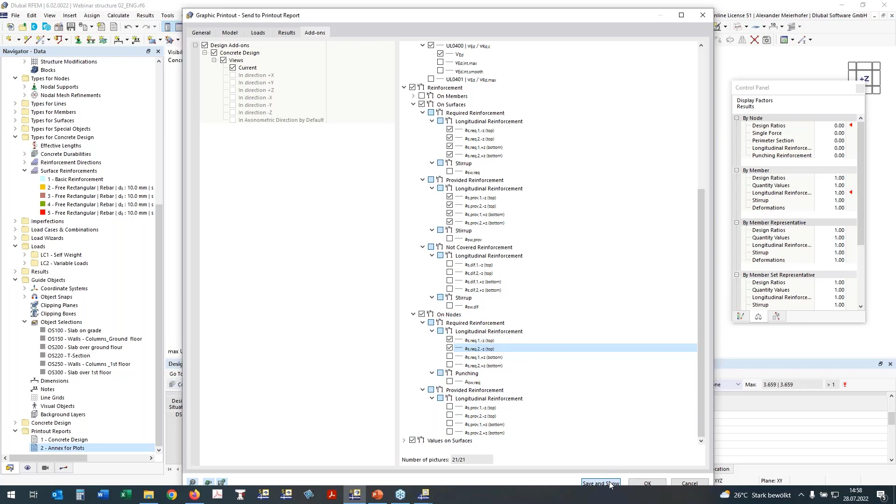Required reinforcement, of course I want to have it shown, my required reinforcement and also my provided reinforcement. For surfaces and for nodes, I need the required reinforcement on the top side, which must be placed for avoiding the punching reinforcement and to fulfill the punching proof without shear reinforcement now.

It is now started to generate. I have selected many graphics. It is started now to generate it here in RFEM, and then we will see it step by step in our printout report.

Oh, this was my failure in the presentation. I selected the wrong one, so let us take a look here. The principle was the same. Let us discuss the result.

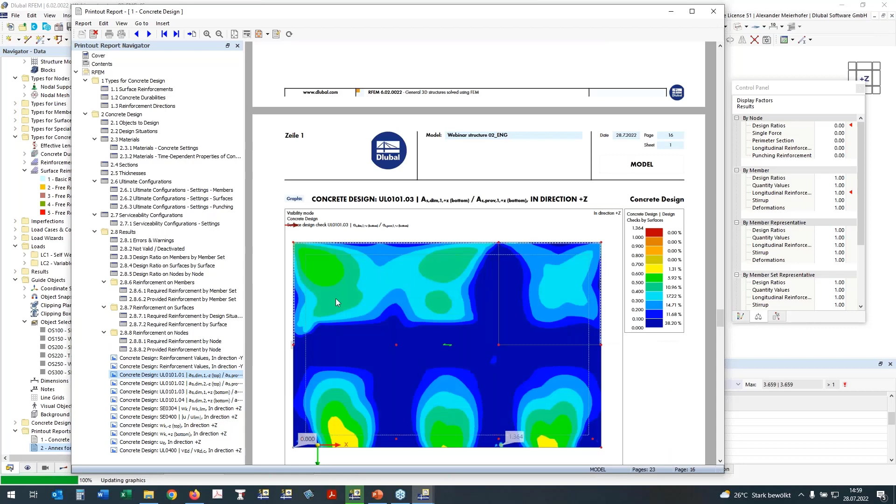It's now in the printout report number 1. Here we see the reinforcement. Everything is fulfilled. Also the ratio of the top reinforcement, the bottom reinforcement, it's okay. Here we have the crack width and the ratio of the deflection, and here also the crack width on the top side and the crack width on the bottom side.

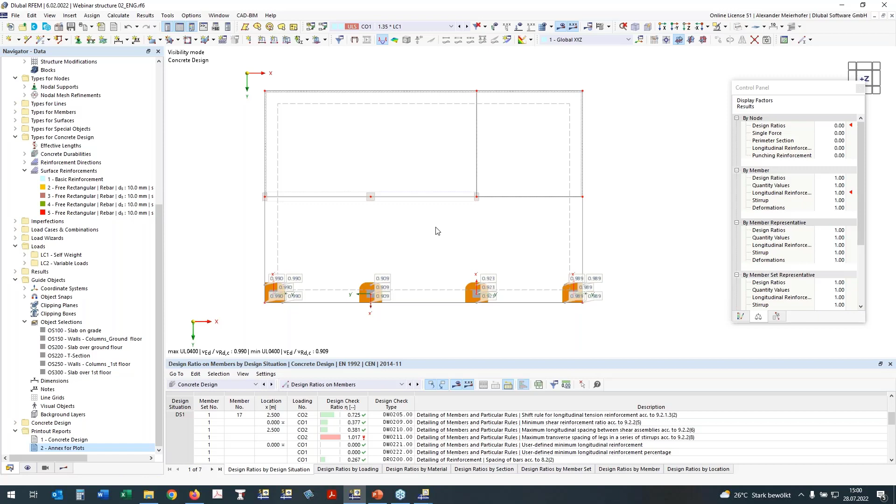Okay, this is the design of this slab, and we are ready with the design of the member of the T section, and also for the punching nodes. I want to show you also the punching design of the foundation slab, where it is a special case. Here we need an iteration of the critical perimeter - where is the critical one? It's not 2D, it's iterative. So we also have to consider the soil stress under the ground slab. This will be done automatically.

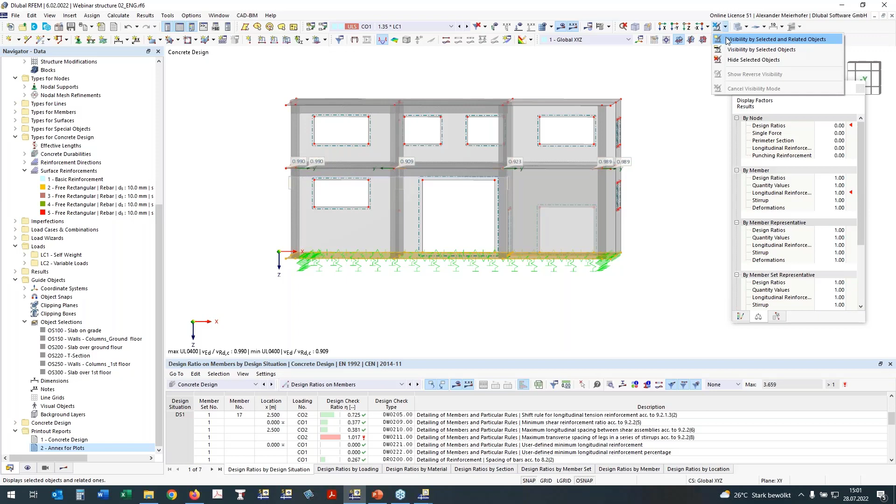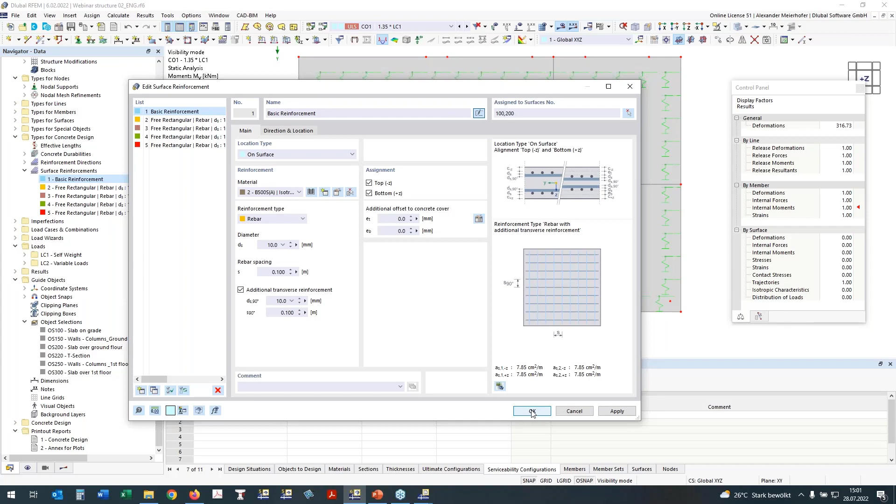I do it in the same way as before: select only our slab, take a view in the Z direction, same as I did in the presentation. I go to the node and say it's my punching design. Of course, I have new properties. Now the results will be deleted. Further, I have to define the reinforcement in the slab so the punching proof can be done. This is very simple in the basic reinforcement - I use the number 100 as I said before. This will be my slab over the ground. Then we can start the calculation of these points, if we remember.

So, if we remember, we have different types of punching design: a wall at the border edge of a slab, a corner column, a column at the edge, a wall corner in the center of a slab, and an inner column in the center of a slab. This will be done automatically in the design.

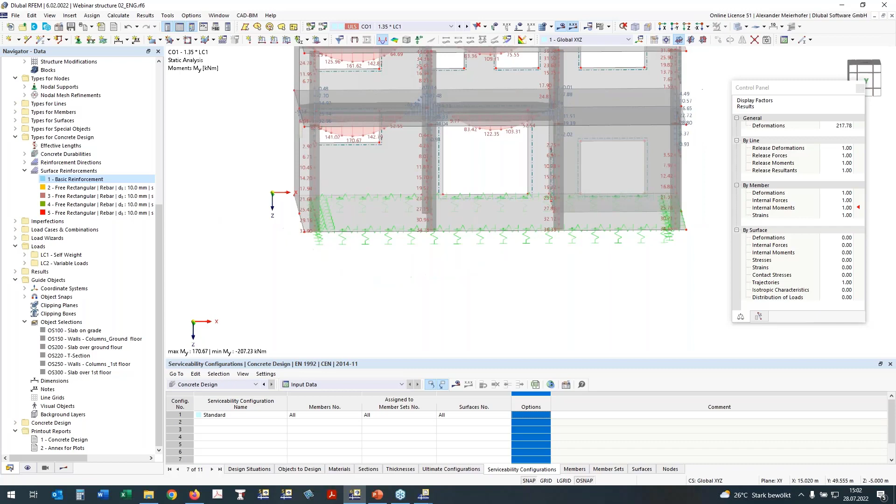I will go to my concrete design. This is now only for presentation, to show how the iteration will work. I will go the same way as before for selection - say please design this node for the punching design. Member sets I don't want, and press OK.

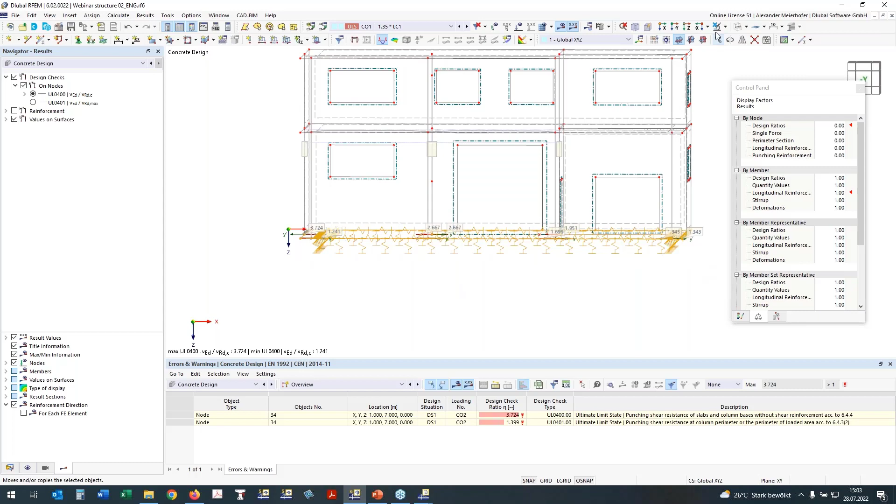Now I will calculate the punching proof for this node on the foundation slab. I'll go to another view, Z direction, it's better. We see that the wall end is found - the property or geometry is founded automatically. It's a wall end. Here we have the columns, and here we have a corner. We also see the result of the iteration finding the critical section. Here it's a very small distance, and here we go until 2D.

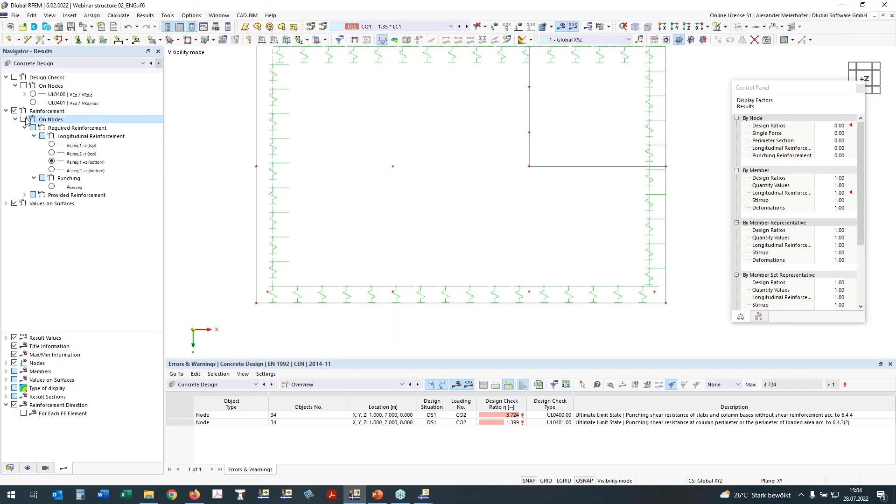This means the reinforcement is not enough, as I discussed before. If we take a look at the required reinforcement of the punching node, we will see if we would need punching reinforcement or if it could be done with some additional reinforcement. We need no punching reinforcement - we can use additional longitudinal reinforcement instead. So the punching design for a foundation slab is now implemented and can be very simply used in your daily work in the design of concrete structures.

Okay, this is an additional topic or feature which I wanted to show at the end of my presentation. I will finish and close my presentation with the picture of the punching design of the soil slab. Thank you for your attention.